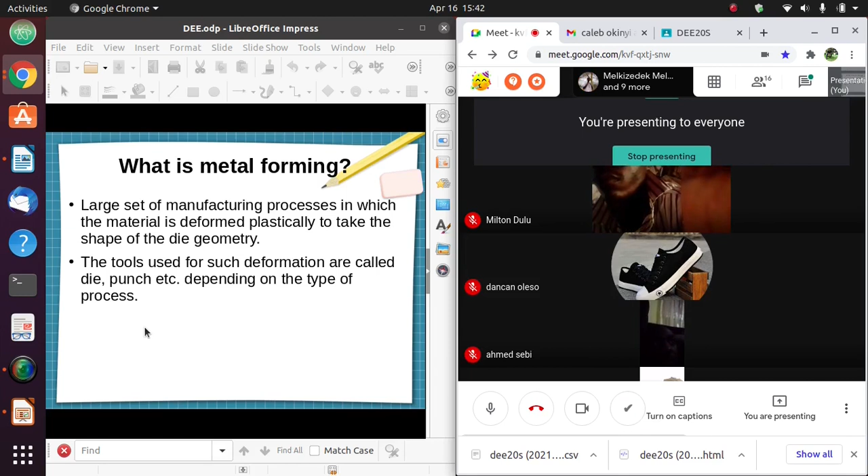But in hindsight, metal forming is a process in which we deform metals permanently, and that permanent deformation is what we call plastic deformation.

I do not know if you can see my diagram clearly. I'm at this table. If not, let me know so that I can maximize it. Anyone, can you see this diagram? You can unmute and tell me if you can see it. Okay.

Okay. Now, these processes are usually categorized into two broad categories. The first one is bulk deformation, and the second one is sheet metal working. When we talk about bulk deformation, tunamaanisha kwamba we are dealing with large forces, large work pieces, large metals. When we talk about sheet metal working, tunamaanisha kufanya kazi na metals that resemble mabati.

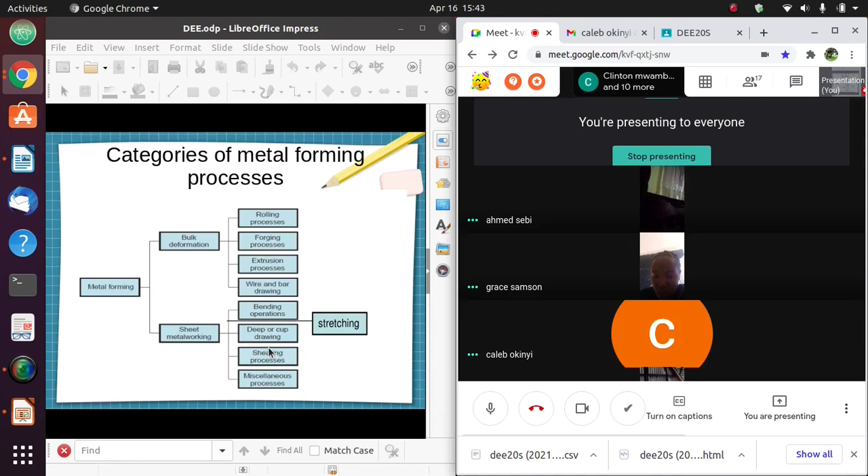Under bulk deformation, under processes that require large forces, we have rolling processes, we have forging, we have extrusion, we have wire drawing, and under sheet metal working, we have bending, we have cup drawing, we have shearing. We will look at some of these individually so that you can have an understanding of what these processes are. Tutaziangalia tu briefly and explain what they are.

Now, under bulk forming, let us start with the rolling process. And the most common example ambayo I can give is kuna ule mtu ambaye anatengeneza juice ya miwa. I think we have seen him around. Ile machine ambayo anatumia is a rolling machine. That rolling machine is used to compress the sugar cane, ili utoe ile juice. It will pull the sugar cane inside those rotating rollers, and then compress that sugar cane ili upate ile juice.

And it is the same in a workshop or in an industry. If I want to compress my metal ili itoke kama mabati, the end product is a sheet-like metal. I will use a roller, a rolling press. So it will draw or pull that metal into those rotating rollers, and the final product I get is a sheet-like metal.

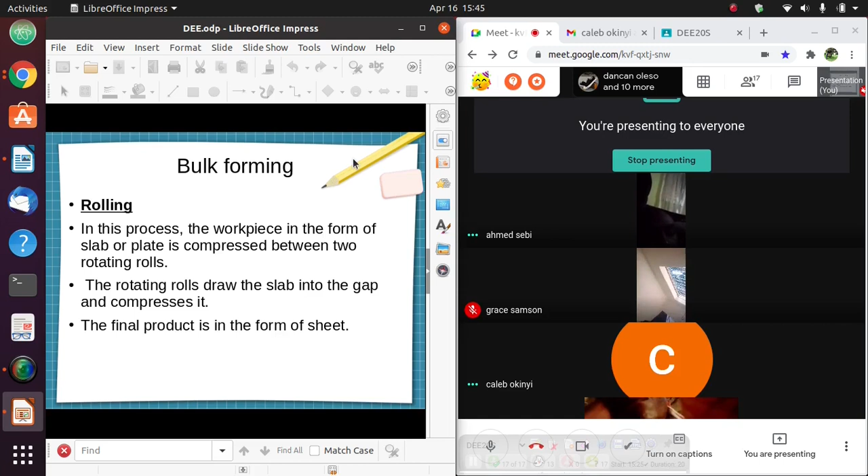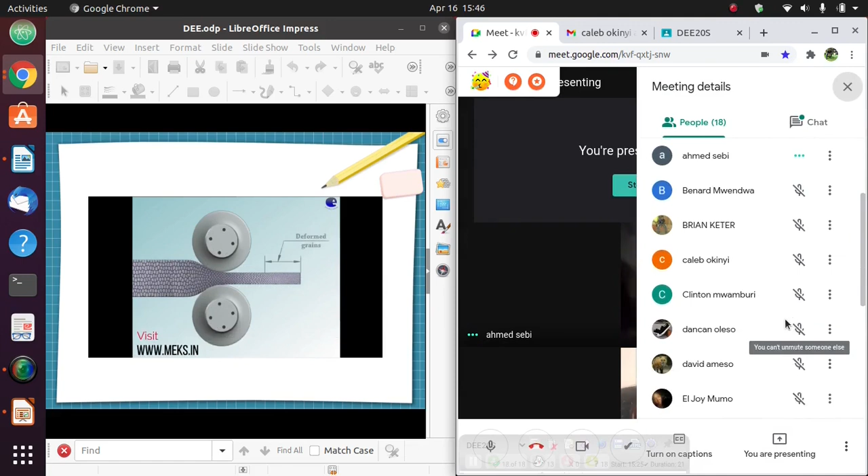I will just play a simple video so that we can have a visual understanding of what the rolling process looks like. Let me know if you can be able to see it and if you can be able to hear. And I'm going to ask again, please, if you're not asking a question, let us mute our microphones. Let me play a video and then let me know if you can be able to see it. I think we have... Ahmed, tafadhali mute your microphone.

Now, I think we have seen the process itself. Niko sure sasa we have an idea of how rolling takes place. We have a piece of metal being pulled into those rollers. Once it is pulled into those rollers, it is compressed. Then what comes out on the other side is a compressed sheet of metal.

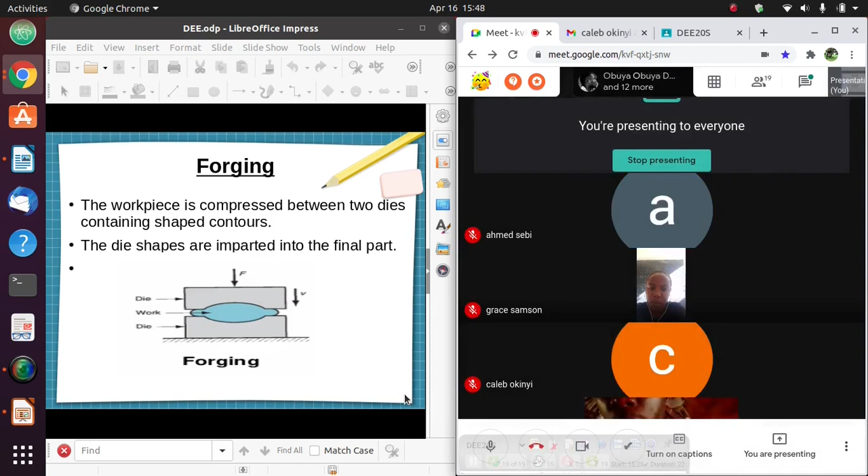For example, if I have a die ambayo iko na shape ya msalaba, and I place my piece of metal inside those dies, once I compress that metal, my piece of metal will take up that shape. So basically the idea of forging is you compress, you apply force, be it by heating, be it by machine, you apply force on a workpiece continuously. And that is what we call forging. Now we have another process known as extrusion.

Sana we do this if we want to change the shape of our workpiece. If I have a cylindrical metal and I want to change it to rectangular, or square, or triangular, I will just take a die whose cross-sectional area is triangular, so that when I push that circular workpiece through that cross-sectional area, it will take that shape. It might assume that shape.

Now this piece of metal is pushed by something known as a ram. We will see that shortly in a video, but inasukumwa na kitu ambayo inaitwa a ram. The workpiece is usually known as a billet. A billet, B-I-L-L-E-T, but you can still say it is metal or a workpiece.

We push that by applying a force through a die, and the final product is usually dependent. Itategemea the cross section. If I have 3 holes, then 3 pieces of metal will come out. So let us look at a video and see how this is usually done in the workshop or in the industry.

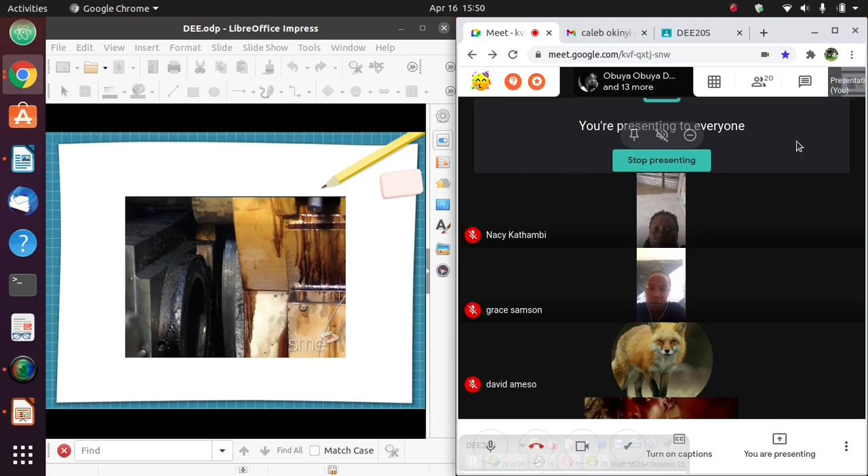I'll stop the video at that point, but I think we have seen how it is usually done katika workshop or in the industry. We push that metal through hydraulic means, or maybe any other means, and we push it in a die, and it will assume the shape of that die.

The cross-sectional shape. If the purpose of extrusion is to reduce the area, we will push it through a die whose area is less than that of the workpiece. If the purpose of that is to change the shape, we can be able to change the shape of that material. Sawa sawa.

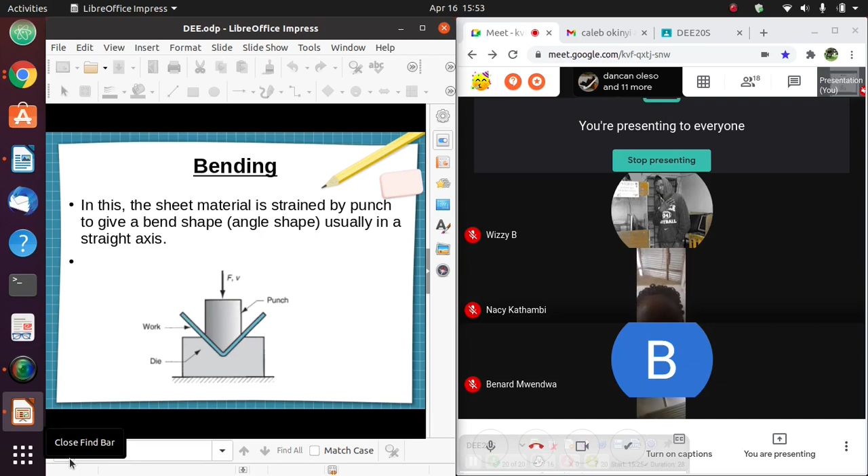We apply a force on that metal using a punch or using a ram or a die. We apply a force. That workpiece will enter into that hole and assume that angle.

Oh, I am very sorry. I'm sorry I'm going too fast. What I'll do is I will send this material to the Google Classroom so that you can get it there. I know I cannot send it through WhatsApp kwa sababu ni kubwa sana since it contains videos. So in case I go too fast, let me know. I'm sorry so much, Benard. Thank you for letting me know.

Now, as I was saying, we will apply a force through that workpiece. Kisha itakunjika. The most important parts in the bending are the contact points. This point at this upper, at this point, and at this point. Are we together? The opening of this die, if it is a large opening, then I will use less force to kunja that metal, to bend it, as compared to kama hiyo shimo ilikuwa ndogo.

What do I mean? If I have a deeper, we will see that shortly in a short video. If this hole ni kubwa to that extent, I will use less force as compared to if that opening was little. Now let us see how bending operation is usually done in a workshop or in the industry.

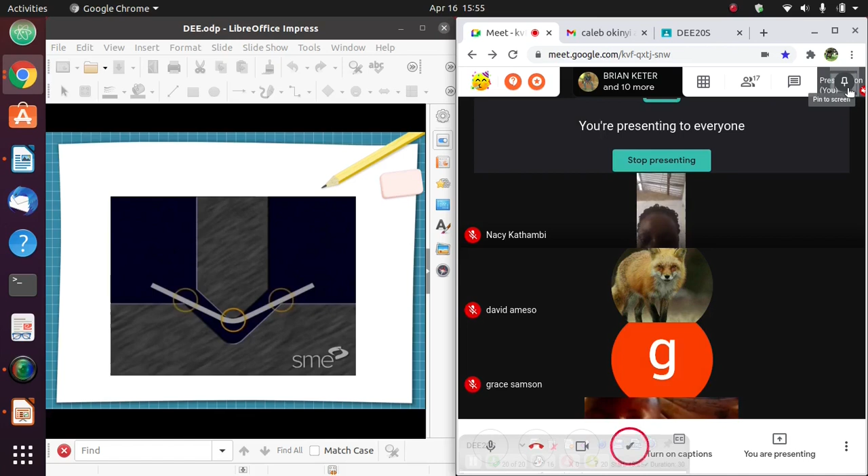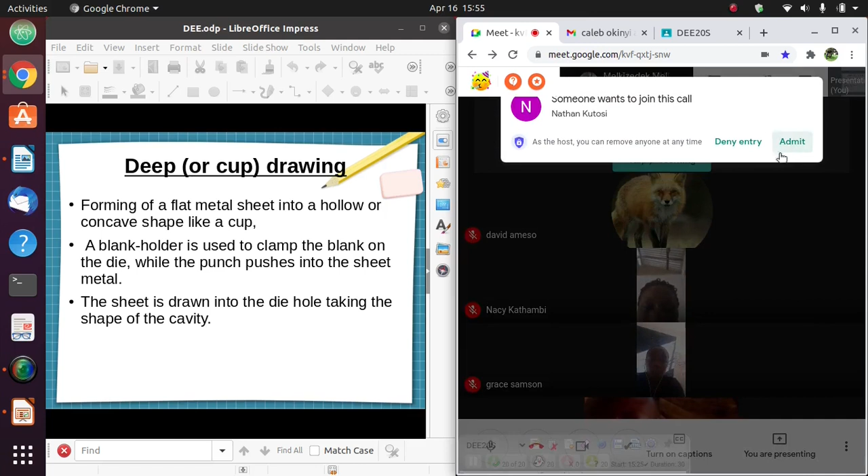Now, I think we have seen the idea of how bending is done. We have a die ama a press ambayo inasukuma the workpiece into those openings. Now, the shape of the corner will be dependent on this. The shape of the corner ama of that bend will be dependent on this punch.

So if I want to have a circular corner, I will just use a circular punch or a circular die. If I want to have such a square corner, I will use such type of a die that has such an edge. I think tumeelewana hapo. Now, another process that is under sheet metal working is deep or cup drawing. This is this process. Let me show a diagram so that I can explain.

This process is usually, we take a piece of sheet metal, tunaiekelea juu ya a die that has a hollow or a concave shape. We take a piece of these blank holders. We make sure that we have secured that sheet metal tightly, and then we will apply a force using a punch.

We will push that workpiece into that cavity. And what happens is that metal is usually stretched in certain parts. Hiyo chuma itavutwa katika certain parts, and then it will take that shape of that die. Sana we do this when we are forming things like bottles or cups, metallic bottles. That is a process. Are we together?

We take a sheet metal, we hold it tightly using clamps. Those clamps are known as blank holders, and then we apply a force using a die or a punch, and we push that sheet metal into that cavity. And the metal will take the shape of that cavity. This process is known as deep drawing or cup drawing.

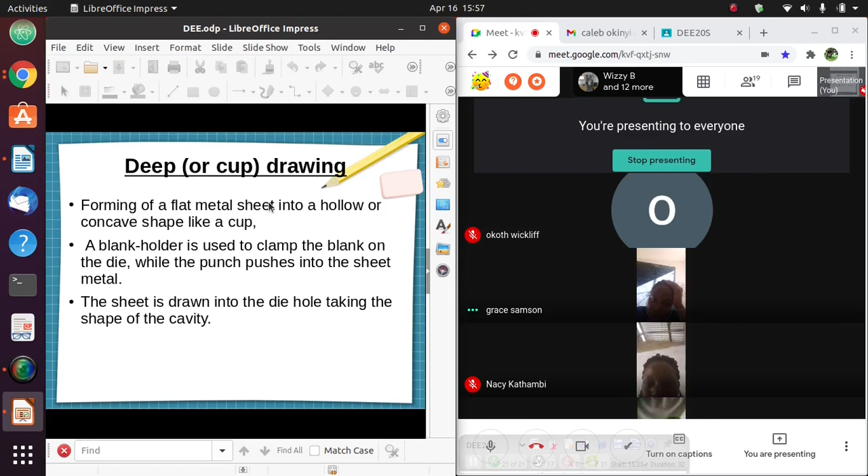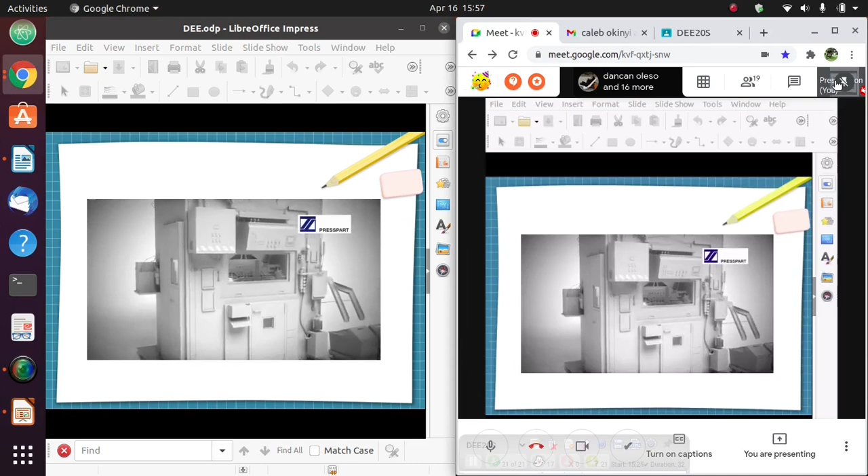Kabisa. Now let us play a small video so that we can see ideally how this is usually done katika industry. Now what I want you to see is this part. We have flat sheet metal, ambazo ziko flat, and they are being pushed into concave holes, and that metal assumes that shape.

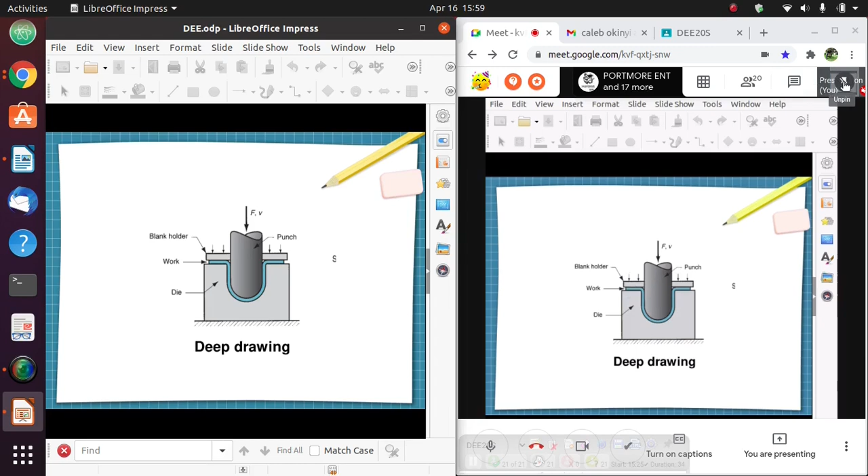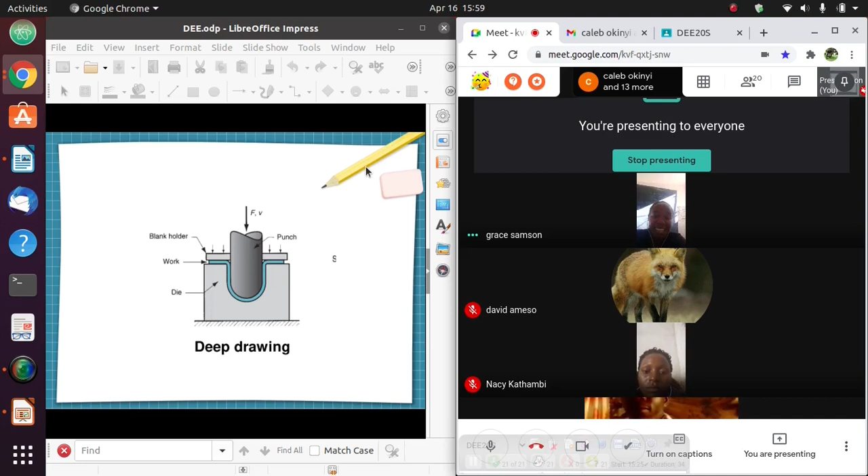Now, I think we have seen how it is usually done, unless there is a question. Kuna swali? Ama mnataka kuona video tena? Is there a question? Kuna swali, let us continue then.

Now, shearing. Shearing ni essentially kukata. The most common example I can give is using scissors. The process of cutting when you're using scissors is shearing. We can do the same using metal, but now hatutakata chuma na makasi. What we do is we put our sheet metal on top of a die, and then we apply a force using a punch. Hiyo chuma itakatika using shearing force. Are we together?

It is a very simple explanation. You are cutting a piece of sheet metal using shearing force. And that force is usually gotten by applying a force using a punch. Utakuwa umekelea your piece of metal on top of a die, kisha unaikata. Sawa sawa? Are we together? Okay.

Now these processes ambazo we've mentioned, there are so many metal forming processes, but these processes are usually categorized into two major processes: cold working or hot working. When I say cold working, I'm working on those metals under something known as recrystallization temperature. Now, let me explain what recrystallization temperature is.

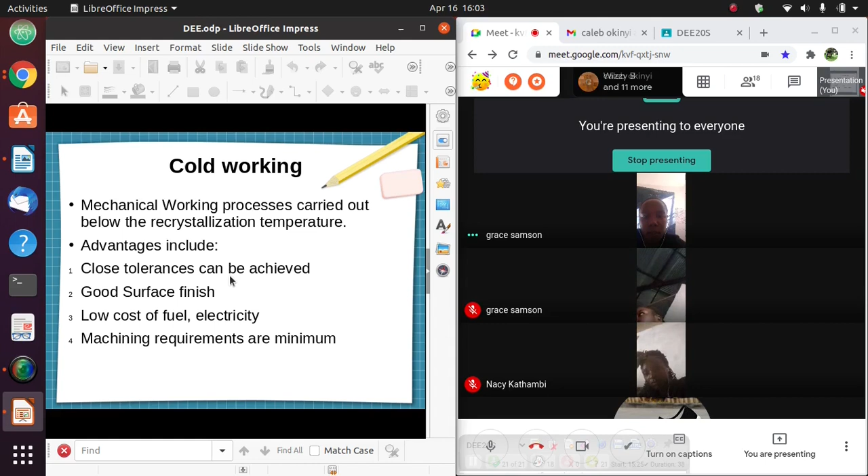Machining requirements I won't have to go back to after I'm done with whatever I'm doing. Let's say I'm forging a metallic chair. The machining requirements, the cutting, the filing, the polishing will be less as compared to that person who has to heat his metal. And those are some of the advantages of cold working.

Now, disadvantage ni zipi? Strain hardening, for example forging. If I work a metal continuously under the recrystallization temperature, the internal structure itakuwa ngumu. It will get to a point that I will have to apply so much force so that I can get that metal deformed. Are we together? And for that reason, I will require higher force just to deform the same piece of metal as compared to that person who has to heat that metal first. Itabidi nitumie nguvu nyingi.

If I'm going to be using higher forces, then my equipment will be more powerful, will be larger, will be bigger. Sawa. Now, some metals cannot be worked on under those temperatures. You have to heat them. Kuna chuma hata ujaribu kukunja namna gani haitakunjika.

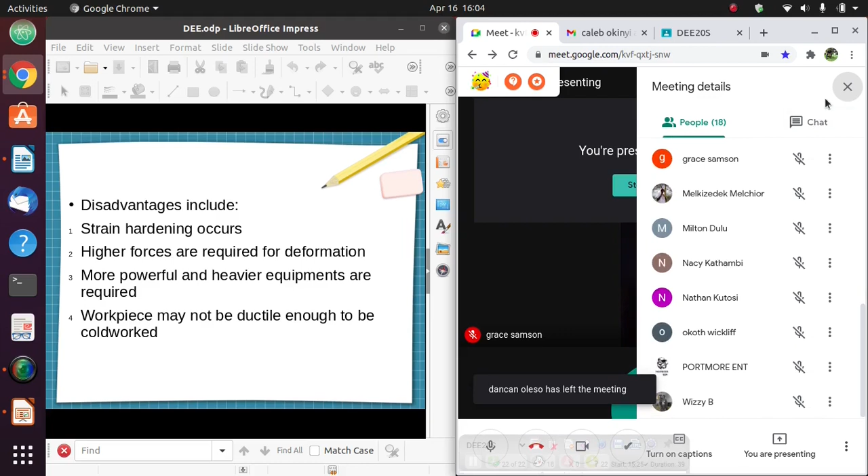We had talked about ductility, the properties of materials. I will refer you back to those properties. If you don't remember, please let us revise so that tusisahau sana. So some pieces cannot be deformed under tensile or compressive stresses. So they have to be heated.

Now, the opposite of cold working is hot working. We have to heat that metal above the recrystallization temperature so that we can work on it. Recrystallization temperature is the temperature at which new crystals, new grains, new structures are formed within that metal or material. So when we work on a metal above that temperature, not the melting point, mind you, that metal has not melted, that process is hot working. So all those processes we had mentioned before, I can either cold work or hot work.

Now the advantages of hot working is I use less forces. Wale watu ambao wanafanya kazi ya blacksmith, they heat their pieces of metal before they work it, because it will be easier to deform that metal. I will require less force to deform that metal. There's no limit of hot working.

What do I mean? If I'm forging a chair, for example, and I'm not satisfied by the shape, by the dimensions, I can reheat that piece of metal over and over again. I can heat it, work on it. Niongeze temperature, I work on it. As many times as I want, until I am satisfied. So there is no limit to the amount of hot working that can be done.

Now, since you are forming new grains all the time, since you are working above the recrystallization temperature, the structure within that metal is better, is finer, as compared to cold working. If I have cracks or impurities, kama nina shida in my metal, in cold working those problems will still remain. But in hot working, since I'm continuously forming new crystals, my grain structure within my metal is finer.

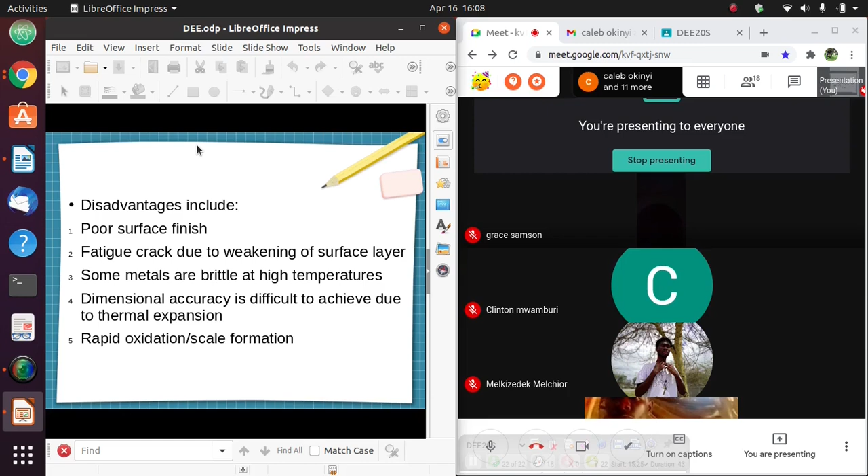If you are together till that point, say I'm present. Tuko sawa mpaka hapo.

Thank you very much. Now, today we are going to look at a very common process known as casting. Tutaangalia casting na kisha tutamalizia hapo. I don't want us to be taking a lot of time in our online classes. I understand bundles are an issue, so let us look at casting.

Now, casting, I'm sure the most common example I can give of a casting is an engine block. The process of casting is you heat a metal until it is molten. Ukishai melt, you take that molten metal and you pour it into a cavity, shimo. Once that metal solidifies, you take it out, and that is what we call a casting. That solidified object or that solidified piece of metal.

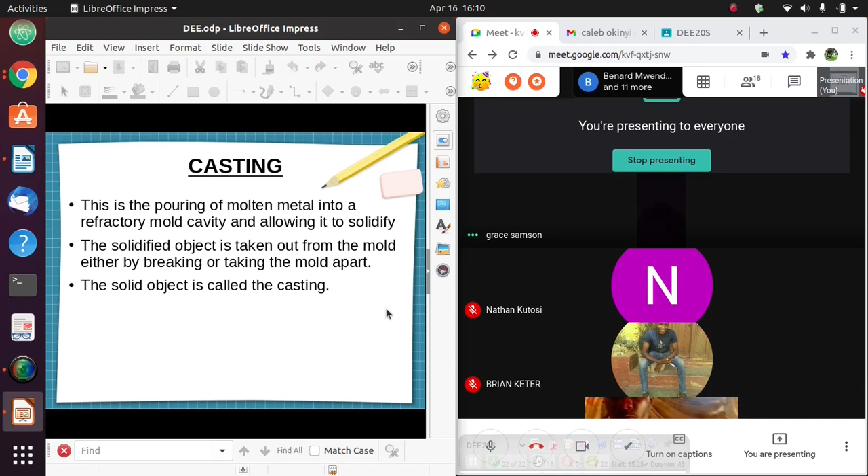Now, that cavity is usually made by things known as molds. Mold is something that you create. Ukishaitengeneza, then you can create a cavity within it, so that when you pour your molten piece of metal into that mold, into that cavity, you can be able to break apart that mold, or you can take it apart, and what you're left with is that casting, that solidified object. Now that is the general explanation of casting.

Now, casting can be of various types, but the most common ones are sand casting and permanent mold casting. Now, sand casting, sana I would call it temporary. What do I mean? We don't do sand casting every day. We do sand casting kutegemea na demand. Let's say your engine imeharibika na ukaambiwa kununua engine mpya ni $1 million ama 10 million shillings. Someone can tell you, my friend, naweza kutengenezea hii engine at 200,000.

But how will he do that? He will not take a piece of metal kisha akaenda akachonga. No. He'll go make a cavity that resembles an engine. He'll take the piece of metal that is, let's say, steel or cast iron, and melt it. And then he will pour that molten metal into that cavity. And once that metal solidifies, he will take it out, and then he will do some machining, and you will have your engine. That is sand casting. The mold in this case is made of sand.

But in permanent mold casting, that mold is no longer made of sand, but now it is made of metal, ni chuma. That mold is machined. Unapeleka chuma katika workshop, inachongwa. Labda you want to make a toy ya Superman. Unachukua chuma, unapeleka, inachongwa, inakaa Superman. You have a mold made of Superman.

Now you'll be taking that mold, kisha you pour molten metal into that cavity, and you'll get your toys that resemble Superman. Sana sana we use permanent mold casting when you're making batch processes. If you're making things in batches, high production, kama unatengeneza 1000 toys per day, you will not be using sand casting, and we will see why. Now I want to introduce you to sand casting by playing a video, so let us be attentive.

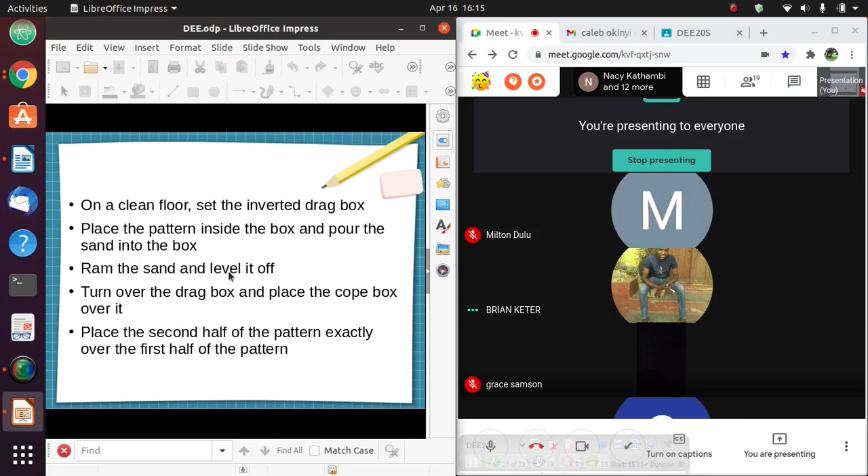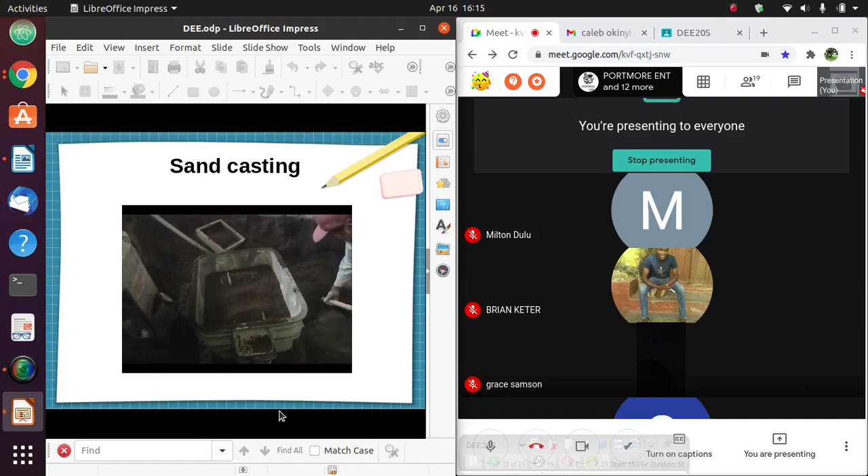Now, what is going on is that they're making the mold, the sand mold, in which they'll create a cavity. This sand is not the usual sand ambayo unaenda unatoa kwa beach, hapana. This is a very specific type of sand. Hata ukiangalia it is black. And I'm going to give you homework. Go find out what type of sand they use in sand casting.

Now, as you can see, there are two boxes. Kuna ya juu na ya chini. They apply a white material so that the sand does not stick on that box. Wanachukua, wanajaza mchanga, alafu wanaifinyilia. The purpose of kufinyilia mchanga is so that it is tight, so that the cavity that you form in that box is rigid, isibomoke. So you have to make sure that in every process unafinyilia mchanga.

They then make a hole through which they are going to pour their molten metal. Now this thing here, this is your pattern. This is what he wants to make from the molten metal.

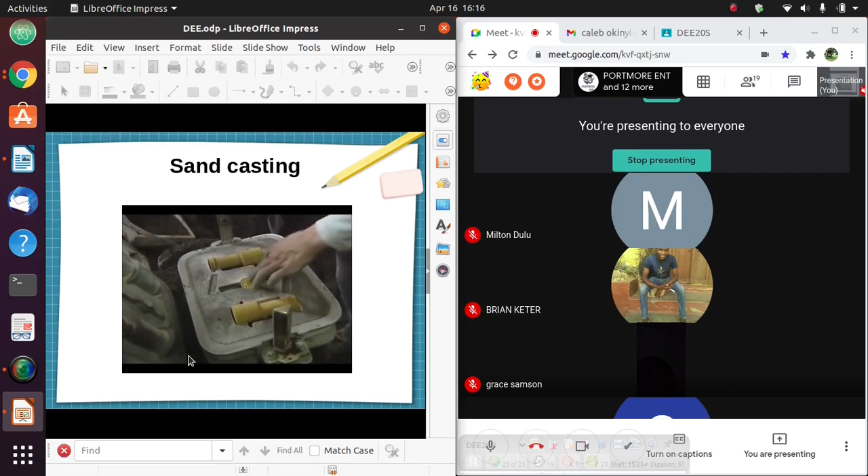Now you put it in the sand, you ram the sand, then you remove it so that when you return those two boxes, you will be left with a cavity. You had placed that thing and removed it, then returned the boxes together. What are you left with? You're left with a cavity that resembles that thing which he removed. That thing is known as a pattern. A pattern is what you want to make.

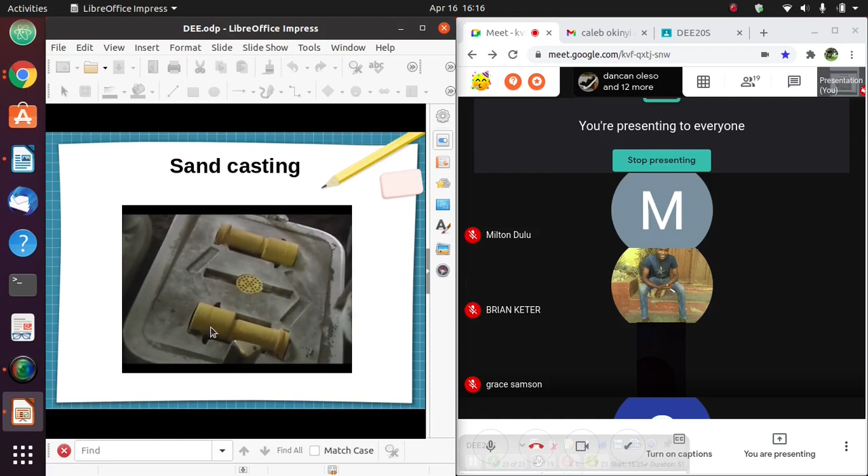These yellow things are known as cores. Maybe in the thing I want to make, I want it to have hollow parts, I want it to have holes. We will see that in a bit. He returns the boxes properly so that they can form a complete cavity with a hole.

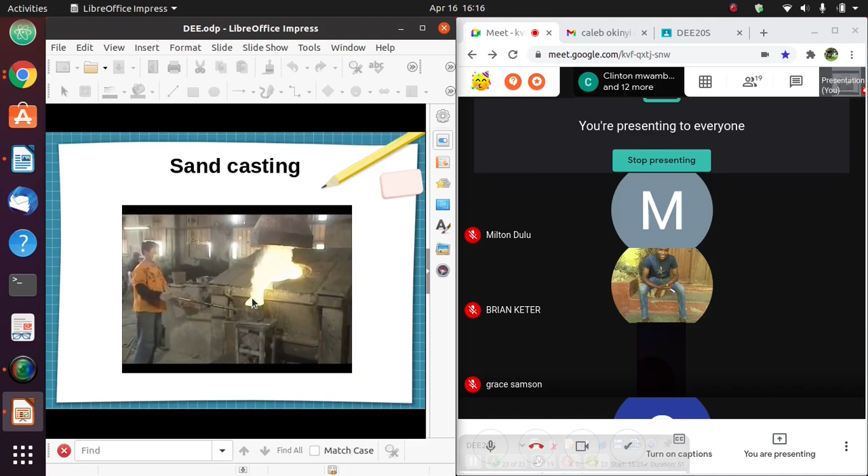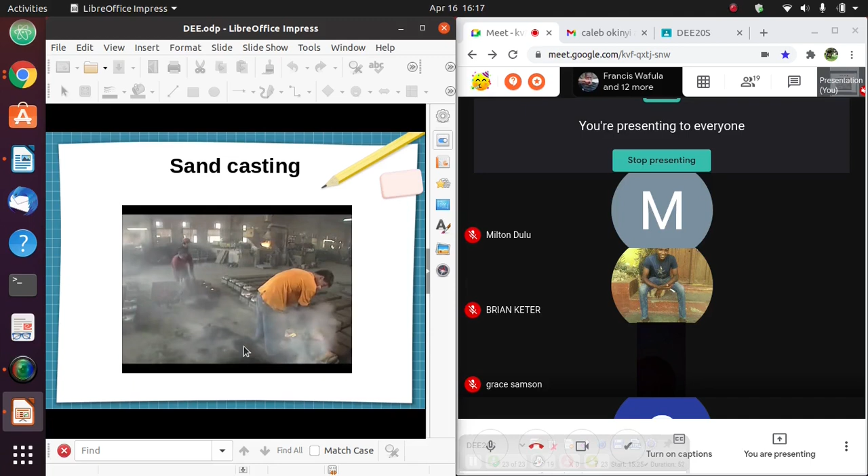They melt the piece of metal that they want to cast. Whether it's steel, cast iron, or aluminium, they melt it. Then they pour it into the holes that were made. Now this molten metal will enter into that sand and it will fill up that cavity. Then it solidifies, not cools, it solidifies.

Once it is solid, they break it. They break that sand so that they can get the piece of metal, the casting. The solidified metal is known as a casting. They break away the unwanted parts. These things, as I was telling you, the yellow things are the cores.

Maybe I want my final product to have a hole, a hollow part. So I will insert a core.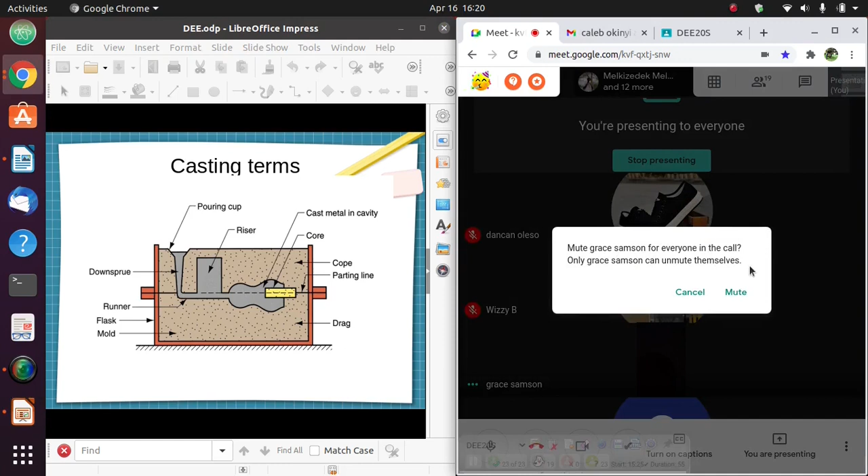A riser is how we use it to know that this cavity has already filled with molten metal. How will you know that? This riser rises all the way to the top, such that when I pour my molten metal, it will fill my cavity first. Once it fills my cavity, it will come and fill the riser. Once it fills the riser and you see that your molten metal has reached up here, then you know it's filled. Because you cannot be able to see what is happening inside, you have to have a mechanism that will help you know that the molten metal has filled the cavity. And this is the purpose of a riser.

A parting line is just a partition that helps you know the difference between the top box, the cope, and the bottom box, the drag. The runner is still another passageway that will help guide the molten metal into the cavity.

Up to that point, is there a question? Is there a question?

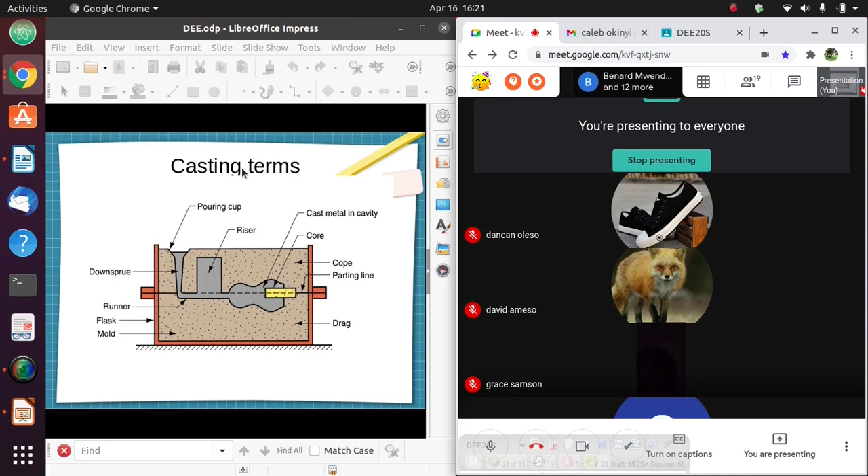Okay, now I will play a video so that we can see the procedure of sand casting. You know I can't just go take sand, put it in a box, and pour molten metal. No, there is a procedure for doing that. Let me play a video so that we can have a basic idea of how sand casting is done. So please let us be attentive.

Sand casting is the most widely used casting process in manufacturing. The advantage of using sand to manufacture metal products is that sand is very resistant to elevated temperatures. Almost all metal casting materials can be sand cast, and sand castings can range in size from very small to extremely large.

Some examples of items manufactured in modern industry by the sand casting process are engine blocks, machine tool bases, cylinder heads, pump housings and valves. Now we will understand the process of sand casting in detail.

First of all, on a clean floor, we will set the inverted drag box. Then we will place the pattern inside the box and pour the sand into the box. After that, the sand is rammed and leveled off.

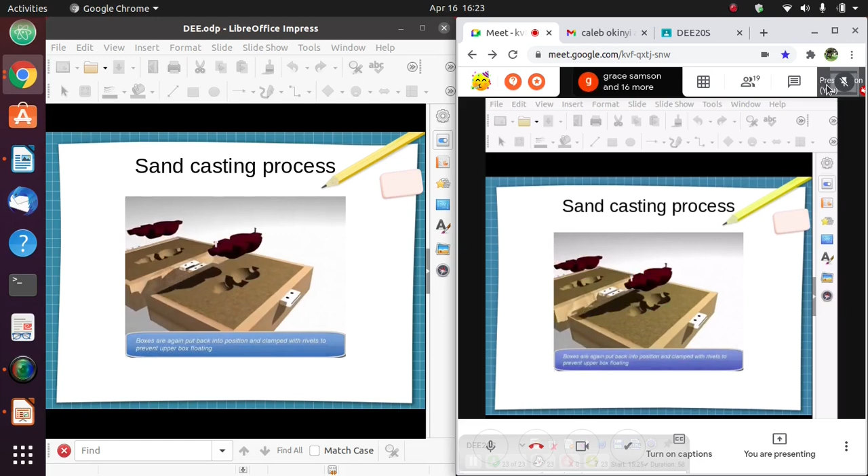Now the two boxes are opened and the pattern is removed with the help of screws. The boxes are again put back into position and clamped with rivets to prevent the upper box from floating. Gates and sprues are formed to pour the metal.

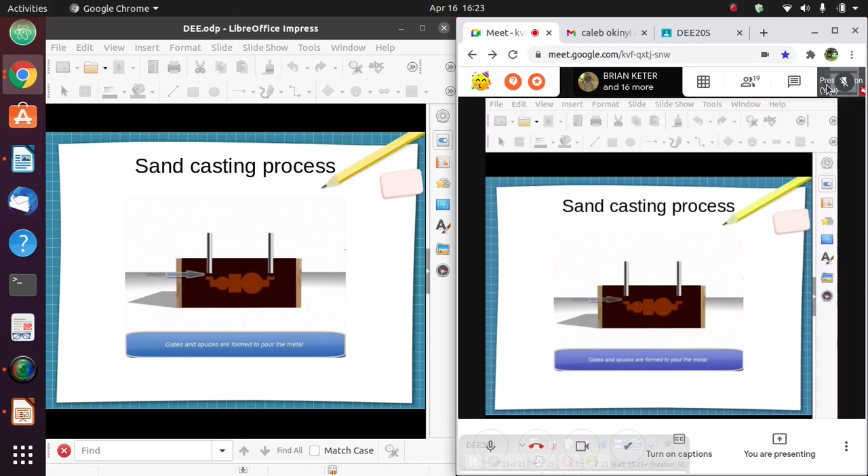Now the molten metal is poured into the mold. Then it is allowed to cool down for some time. After cooling, the final cast is taken out.

Now let us look at the advantages of sand casting. We are able to make complex shapes in sand casting, for example an engine block. It is very difficult to do otherwise.

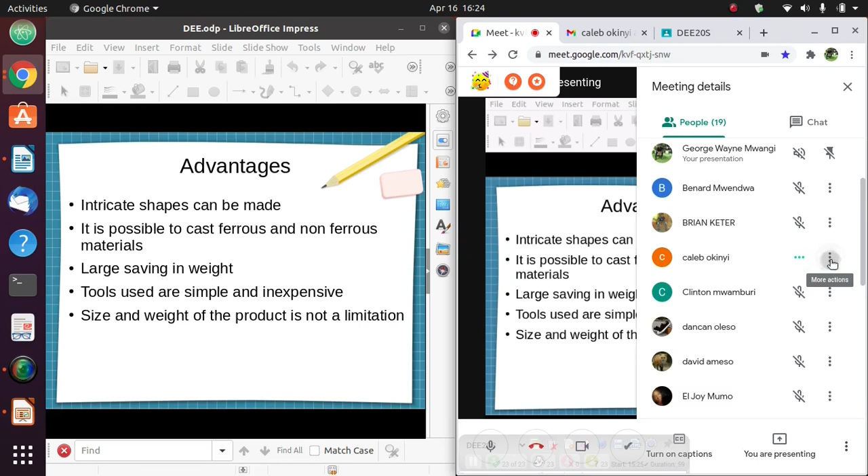You cannot go into a machine shop and carve it out directly - no, you can't do that. But you can sand cast an engine block by making a pattern or cavity that resembles an engine block, and we pour molten metal which will solidify and resemble that engine block. So we are able to make complex shapes.

It is also possible to cast ferrous and non-ferrous materials. There is no limitation - as long as a metal can melt, then it is very possible. Even non-metals can be cast.

The day you see sand melt, tell me - even I want to see that. The sand is highly resistant to high temperature, so you can cast metals with temperatures as high as 3000 degrees Celsius.

Now we have the tools, which I think we've seen in the videos. The tools used in sand casting are very cheap. They're inexpensive and common - something you can go to a hardware store and get even for 100. They are inexpensive and simple.

The size and weight of a product is not a limitation. I can cast an engine that is over 1,000, 2,000, 3,000 kilograms, and I can also cast something as tiny as a pencil. So the size of the product is not a limitation, and neither is the weight. What matters is how big my mold is and how well I can make my mold.

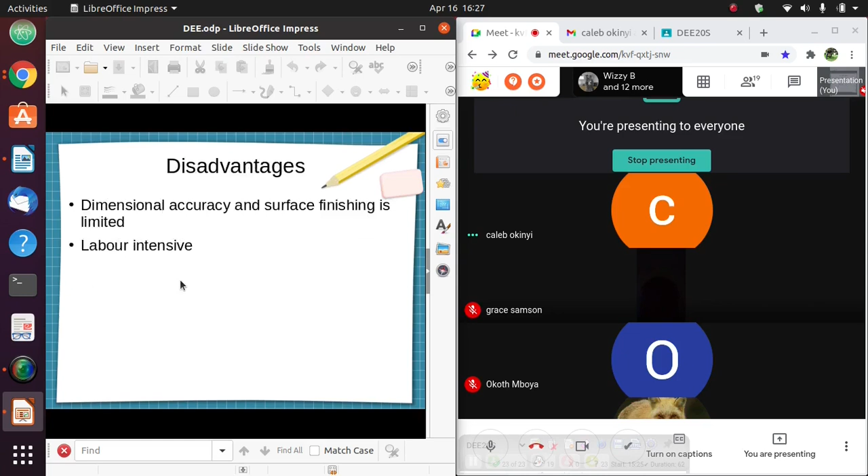If in your mold, for example in this downsprue, the sand breaks and falls into this hole, we will use a lifter. You take the lifter and fix that hole properly, removing the sand that has broken and fallen into the hole. So a lifter is usually used to fix those broken holes, or sand that has fallen into holes.

We have a strike off bar. Let me go back again - once I have poured sand into these boxes and there is excess sand on top of the boxes, I will use a strike off bar, passing it over the top of the box.

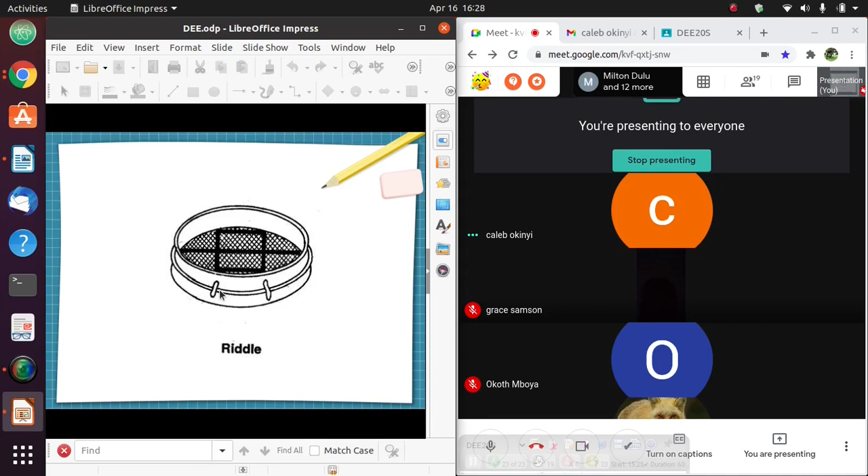I will pass it over the box and any excess unwanted sand will be removed. That is what we use a strike off bar for. We have a riddle - riddle is a sieve. Especially when it comes to the sand around the pattern, we want that sand to be fine, very fine. We don't want lumps in the sand around the pattern. So we put the sand into that riddle, then we sieve it, so we'll have fine sand falling on top of the pattern. Then we can add sand using the shovel and pack it tight. So riddle is a sieve. Now, vent wire.

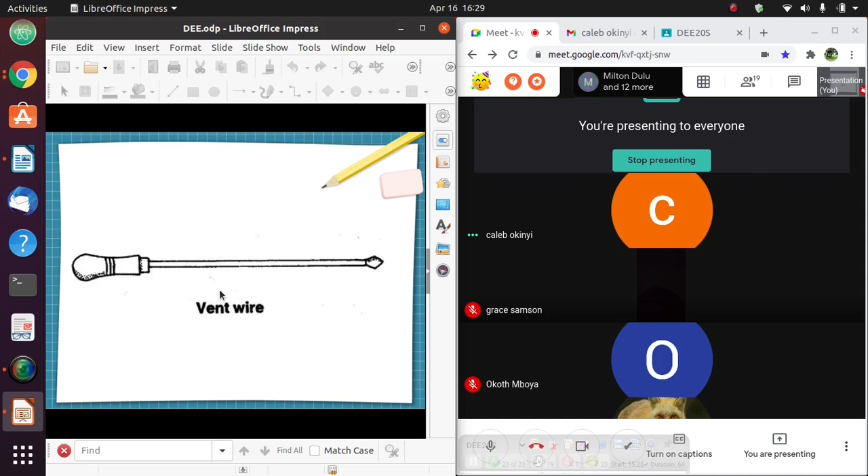Now this is a very important thing that I didn't show in the video. Once you're done making your mold and you want to pour your molten metal, a very important process is venting. You take the vent wire and make holes in the sand mold. The reason is the hot metal, the molten metal, contains gases, hot gases. So once you pour that into the cavity, these hot gases will be looking for ways to escape. If you haven't provided vents for those hot gases to escape, then those hot gases will expand within your mold and break it apart. I had given an assignment in the Google Classroom, I don't know if everyone has seen it - defects in casting. I want you to go read using diagrams and write a little about it. One of those defects is if you don't allow for those hot gases to escape, your casting will break apart, your mold will break apart.

Now, rammers are what you use to pack the sand tight. If you're in an industry or a plant or workshop that has mechanical rammers, well and good - you'll just put your box and it will be packed by the machine. But if you're doing it by hand, you'll use these hand rammers. They look like a corn pestle, the hand one. You use it to pack the sand into the box until it is tight and proper.

A sprue cutter - now we use this. Let me go back a bit. We use a sprue cutter to make this hole, this passage through which you'll pour your molten metal. So ideally what we do is we put this sprue cutter in the box, then we put sand on top - we fill the box with sand and ram it to make it tight. Once we are satisfied, we remove that sprue pin or sprue cutter, and what we are left with is a hole, a passage for the molten metal to pass through. Are we together?

Yes, together. If you are together, unmute and say 'I am here.' I am present.

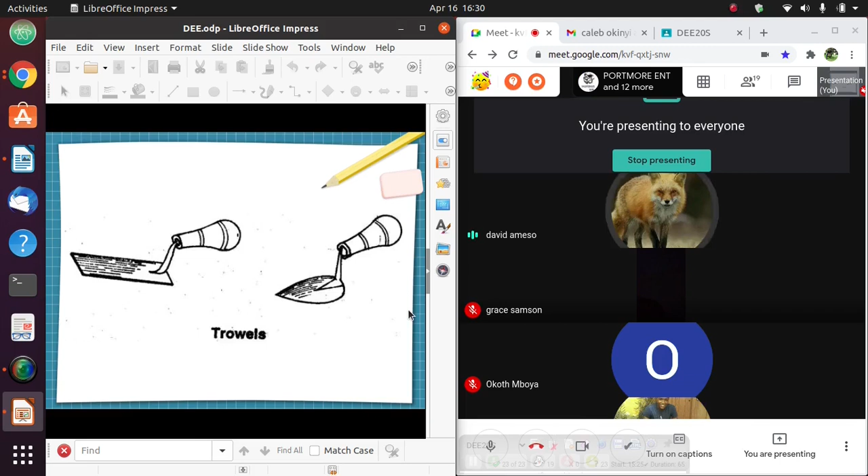Present, thank you. Now, what we've just talked about is sand casting. The mold was made of sand.

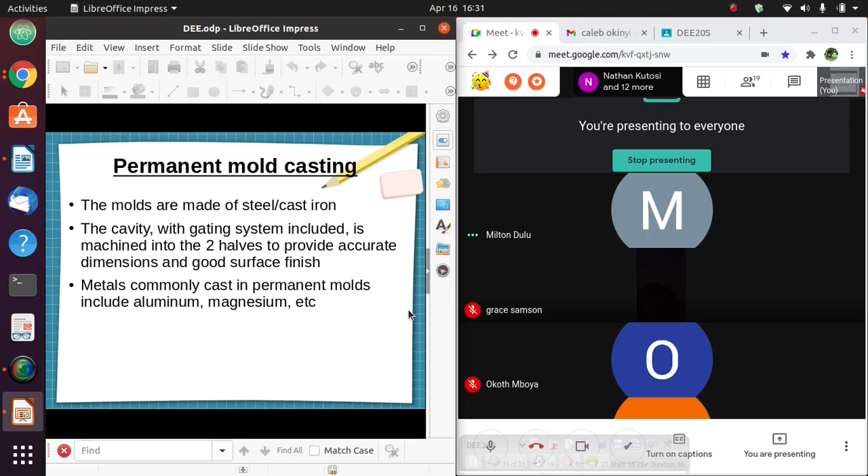Now, the opposite, the other type of casting is permanent mold casting. In this case, the mold is no longer made of sand, it is made of metal. It is permanent - you won't have to break it to get the casting. No, it is made of metal, and the mold is usually made of steel, cast iron, or aluminium, depending on the metal that you're casting. What you do is take this piece of metal, take it to the workshop, and it is carved so that the cavity, the pattern of what you want to make, is made within that mold. It's carved into that mold, so that when you combine those two molds, whatever is formed inside is the cavity. In this case, you won't be making a pattern separately, no - the pattern is made inside the mold.

Now, the steps that we take in permanent mold casting: you have those two molds, one is usually fixed in place and another one is movable. These molds are preheated and are usually sprayed with a coating - this is like a lubricant - so that molten metal, once poured into that cavity, flows easily, enters smoothly or enters very well. So we preheat it and apply a coating of lubricant. Once you finish, you close your mold. The reason we close our mold is so that we can form a cavity, because our pattern is usually imprinted - mostly it is carved into those molds. Once we close it, that is when the cavity will be formed.

Once that cavity is formed, we pour molten metal into that cavity. Once you pour that molten metal in, it will solidify. I want you to note, I'm not saying it will cool - we don't wait until it cools completely, no, it solidifies. The minute it solidifies, we open our mold and we remove our casting. Are we together?

Yes. Now, the reason why I'm not saying cooling, especially katika permanent casting, I think we can read this part, is that if I let it cool beyond a certain point, this is a permanent casting, the shape will not change, the dimensions will not change. Kwa hivyo itafika mahali during the cooling process ama the solidification process, that permanent casting will not accommodate that cooling. Itafika kwa sababu haisongi, the dimensions are not changing, haita accommodate the cooling process. So what will happen is cracks will form.

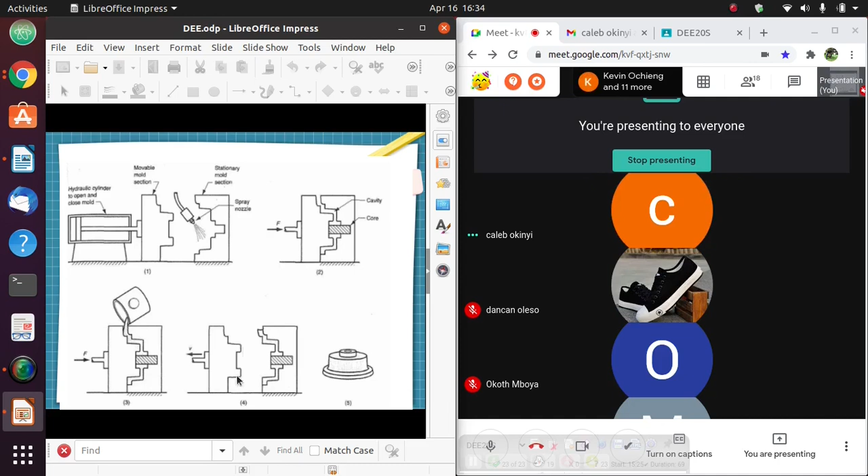Now, if I want to make a workpiece, my final product, nataka iwe na hollow part, I will insert a core, so that when I pour my molten metal into that cavity, it will solidify around that core. And once I open the cavity, the mold, and nikitoa that core, what I'm left with is a casting that has a hollow part. Ukishafunga, you pour your molten metal into that cavity. Once it solidifies, you remove the movable mold, and what you're left with, in this case, this is our final product. This is our casting. Sawa.

Now, there are certain advantages of using permanent mold casting. The biggest one is surface finishing. You can imagine the surface of a piece of metal and the surface of sand. The surface ya chuma will be smoother, will be finer as compared na ile ya mchanga. So the surface ya chuma, the casting that will be produced will be smoother than that produced using sand casting.

Now, dimensional control, the accuracy of your finished product will be better. Reason being is that your permanent mold is permanent. It doesn't change. Dimension haibadiliki. If my final product will be 10 centimeters by 10 centimeters by 10 centimeters, then tolerance itakuwa very, very minimum, maybe plus or minus 0.05.

In sand casting, my dimensional accuracy is dependent on the work I do. If I do my work very well, if my craftsmanship ni nzuri sana, then I will have a good final product. Nikifanya kazi mzaha alafu for example, si kama sitafinyilia mchanga vizuri, then my workpiece ama my casting will come out horribly. Since we have good dimensional control, then the internal structure of that casting will be fine.

If I'm making a workpiece, my casting is 10 centimeters. My mold is 10 centimeters by 10 centimeters. I pour molten metal, and what comes out is 10 centimeters by 10 centimeters. The internal structure will be better as compared to a sand casting, ambayo it is dependent on the work of that person doing the process. For that reason also, casting ambazo na produce are stronger. The internal structure, the internal bonds are stronger.

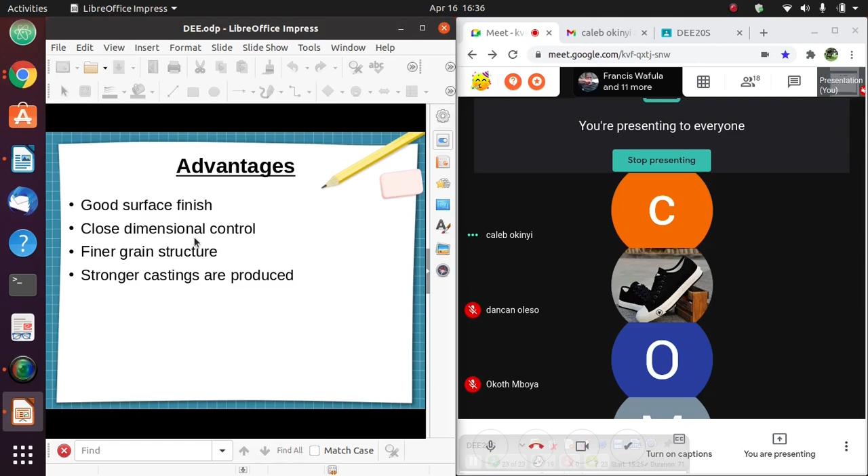Sawa. Disadvantages. The biggest disadvantage is I cannot cast a metal which has a higher melting point than my mold. Remember, permanent molds are made of metal. If let's say my mold is made of steel, and let's say that the melting point of steel is 1,000 degrees Celsius, I cannot cast a metal whose melting point is above 1,000. Sawa. If I pour a metal whose melting point is 3,000, itaharibu my permanent mold. Itaichoma, itaiunguza. It will even melt it. So it is only limited to metals with a lower melting point.

The making of those molds is also expensive. Hiyo kuchonga hiyo pattern katika hiyo mold ni very expensive. That's why it is usually limited to very tiny products. Utapata inatengeneza toys. It is in very, very tiny pieces, very simple parts, because it is very expensive to produce those molds.

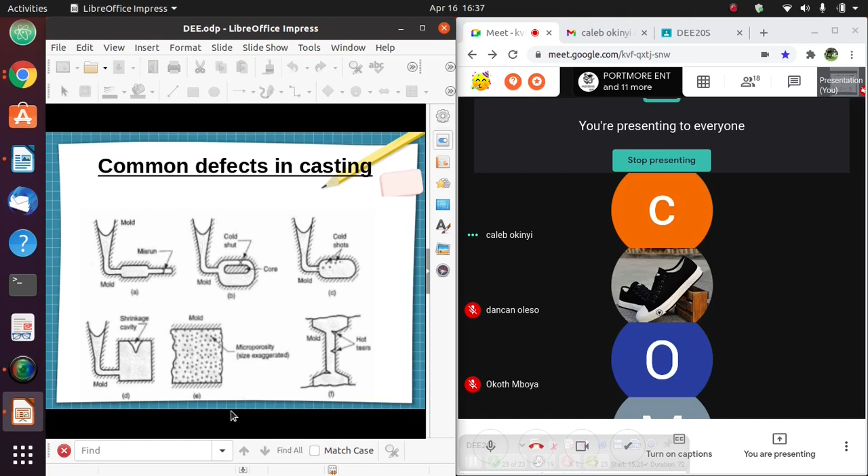Now, this is a simple diagram showing different types of defects that can be found in castings. What I want you to do in your assignment is I want you to go find these defects. Come up, chora diagram. Explain how they are formed. Are we together?

Tuko sawa? Yeah. Kama tuko pamoja, unmute and say I'm here. I'm present. I'm here. Thank you. Yeah. Now we're almost done.

Tuko karibu kumaliza. Now, I think katika ile video ya kwanza ya casting, ile sand casting, once they were done with that process and they removed the solidified piece of metal, walikuwa wanavunja ile mold, wanachukua nyundo, wanagonga, wanatoa mchanga. So once you're done with your casting process, you have to make sure that the final product is what you want it to be. Si ati ukishatoa ile casting umemaliza kazi, no. You have to machine it, you have to clean it, you have to polish it so that it can have that final desired product. Now we can classify the cleaning into very simple categories, kama rough cleaning.

Let me go back kidogo. And I want to use this diagram to explain. Now, I've poured my molten metal through this cavity. Ikaja ikajaza hii cavity. What I want, ama my final product, is this bottle. Nataka hii ndio nataka. But since nilimwaga molten metal ikajaza huku, saa zingine if I had made vents, zikajaa pia na molten metal. Once those parts solidify, I will have this, my final product, but I will also have this, and I do not want this.

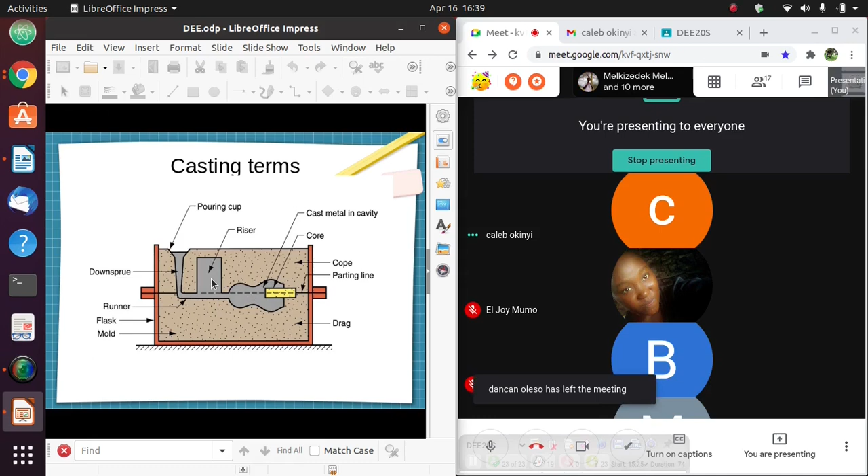So what I need to do is remove them. And how can I remove them? Kuna ile rough cleaning. Naweza chukua ile cast nikaangusha, ikavunjika, those unwanted parts ikavunjika. I can take a nyundo nikagonga nikatoa those parts. Surface cleaning. The materials that usually stick on the surface of those castings, the sand, mfano in sand casting, stick because of the hot temperatures. So I have to remove that sand. I can use a wire brush. I can use grinders.

Trimming. There are very small pieces of metal that are unwanted in that casting. So I remove them. Another, a chisel. I can use a file to remove those unwanted parts. Finishing. Once I'm done with all those processes, then I can do the finishing and decorative processes we had talked about in our last class. Electroplating, polishing, buffing. Depending on the purpose of your casting, I can apply those finishing processes. Now, let me play a small video that will show someone cleaning his casting.

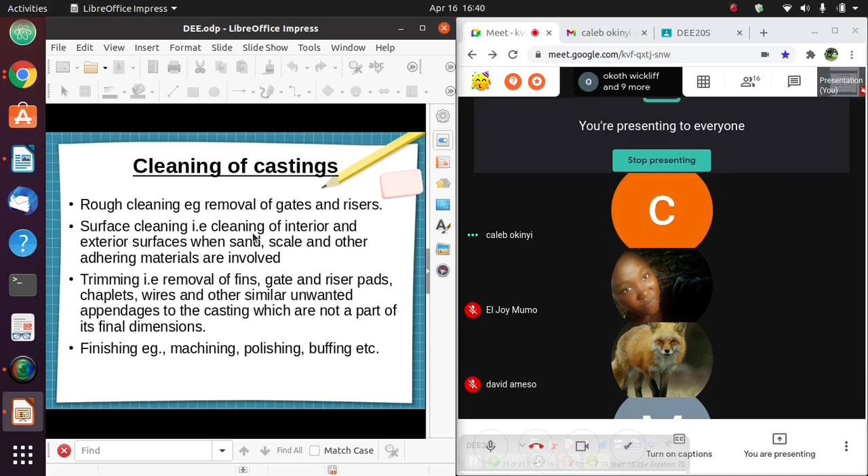YouTube, this morning we're going to be cleaning up the casting that we made last night. So I'm going to start by cutting the sprue off.

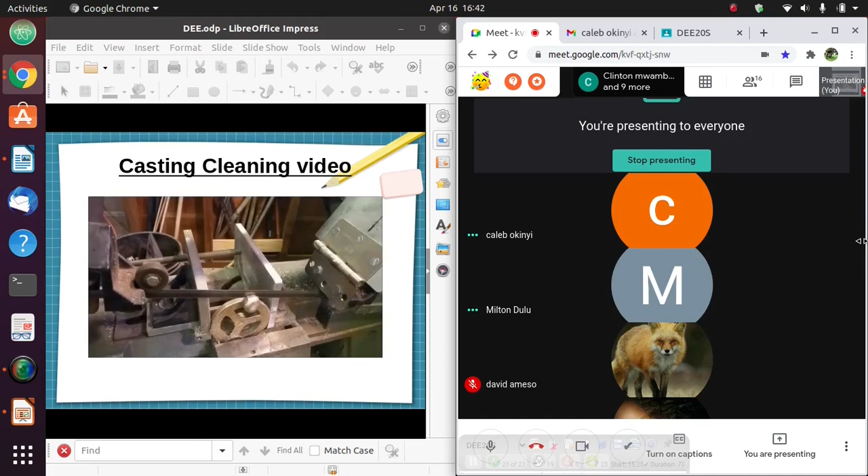Now what he's removing is that place ambapo ulimwaga the molten metal. That part will also have... you can remove this using a hacksaw.

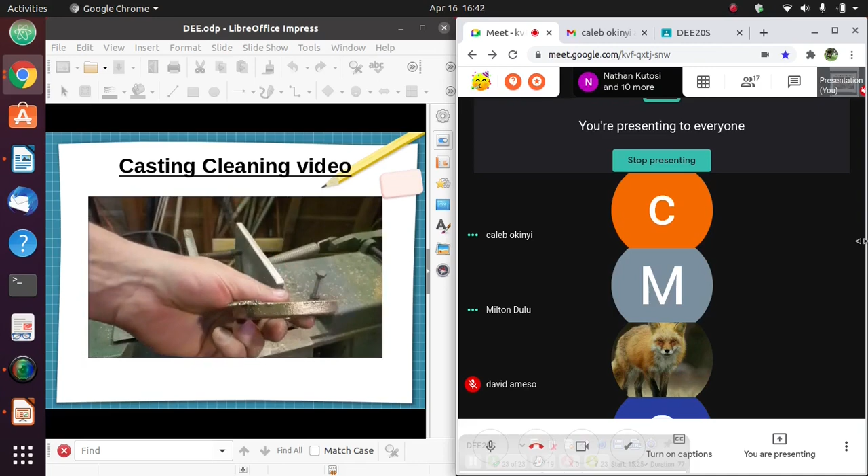Okay, so yeah, I ground those off with the grinder. That was a lot easier. Alright, so I'm going to reseat this guy again. Check it for true. Alright. There's the start.

Now let me mention something. For those people who have never seen a lathe machine, L-A-T-H-E, lathe machine? I was explaining this especially katika ile topic ya workshop safety, and I tell you not to have loose clothing in the workshop, kwa sababu ukiwa na loose clothing inaweza shikwa katika hii rotating head ikakuvuta ndani. So we use it for machining processes, cutting, drilling, facing, turning. We will see this when you go to workshop.

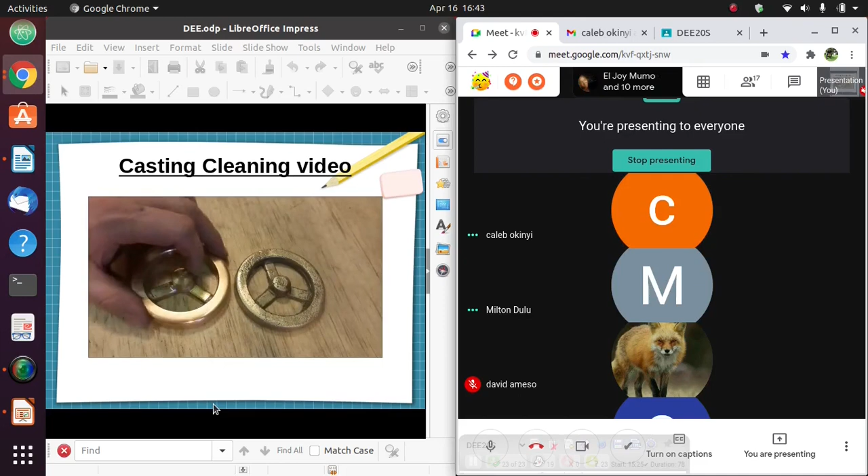Alright, YouTube, here's the pattern. And here's the casting cleaned up with the sprues cut off.

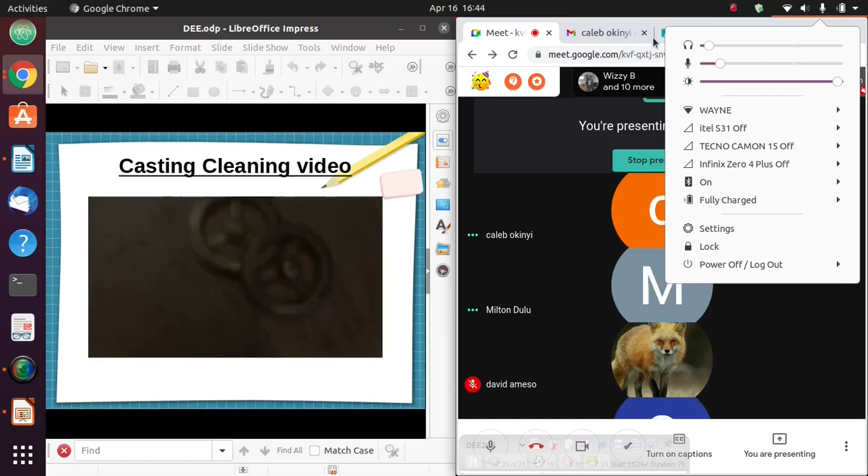This is his pattern. This is what he will place in the sand mold. Akishaweka hii anaitoa. What is left in the sand mold is a cavity. Akishamwaga the molten metal and it solidifies, this is what he gets. This is what he wanted to make from the molten metal. So as you can see, the surface finish from sand casting is poor. So that is a very basic video of cleaning of sand casting. You can do that in many ways. Are we together?

Now, the last thing we will talk about today is inspection of castings. We have to ensure the castings that we make are of standard. And how do we do that? There are very many ways, but the most common are non-destructive methods and destructive methods. As the name implies, in non-destructive, hauharibu that casting. Let me give a very simple example. Unapeleka casting ifanywe X-ray, radiographic inspection. Once you do an X-ray on that casting, we can see the internal structure of that casting. If there are any internal cracks present, we will be able to see them.

Another one, fluorescent dye penetration. You take a dye, a colored liquid, you apply it on the surface of a casting, and then you wipe it off. If there are cracks or holes in that casting, then that colored liquid will remain in those cracks, in those holes. Then you will know that there are cracks or there are holes. And there are so many. You can use magnetism to determine whether that casting has cracks. The other method is destructive.

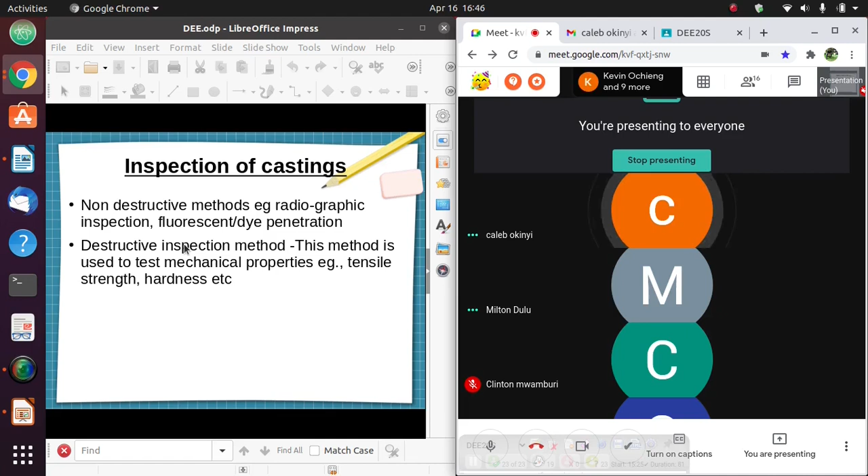As the name implies, you will take a casting and naipeleka lab, and it will be tested. Itachukuliwa ikavutwa, and we will see at what force, at what stress it will break. It will be taken through many tests to test the hardness, the durability of that casting. Let's say if I'm casting a suspension ya gari, I have to know that casting will be able to withstand those forces. And I do that by taking that casting into a lab through destructive inspection methods. Are we together? Yes. Now, for today tutaachia hapo.